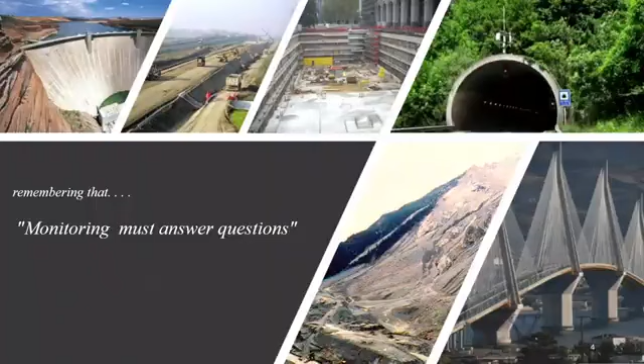This is something that I remember, and this introduced the concept that looking at details, we have to remember that monitoring must answer questions. Since we are dealing with many different types of projects or structures, each with different problems, we have to be very keen on small details which can make the real difference. Sometimes the difference between success or failure is due to some small details. So we have to always consider that details are probably the most important part of our activity. So we have to answer questions.

Why questions? Because there is something that we don't know, some unknowns. I had permission from Alan Marr, who was the first John Dunnicliff Honour Lecturer, to use this slide that he presented in London four years ago regarding the problem of the unknowns.

We have different types of unknowns, or something that we have to understand. We have what is called the known knowns - that means what we know about something. The known unknowns - what we know to be unknown, that there is something we don't know and have to understand. There are unknown unknowns - what we don't know, something that can happen, or something we are not able to understand and consider.

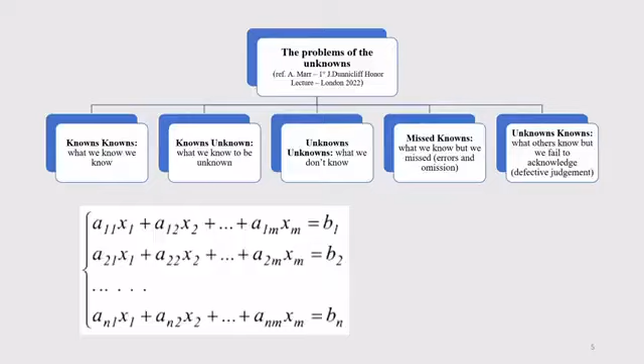Defective judgment. So we have this as reference, and if we look at this from the analytical point of view, it's like having a system of equations to solve, where sometimes the number of unknowns is greater than the number of equations that we have. That means we cannot solve it. This means our knowledge of the world we are dealing with is limited. We don't know everything about what is around us.

So we started from question to answer. We realized that our knowledge is limited, that we need understanding. But how can we solve the problem if the analytical solution is not possible? We have to change completely our approach.

We have to use two capabilities that we have: genius and ingenuity. What are they? Genius is what we can call intuition - a person's characteristics, disposition, natural inclination, or temperament, something that is inside us and enables us to understand, to know something. Ingenuity or skill is the ability to invent things or solve problems in intelligent new ways. This is probably exactly what we have to use when we approach a problem that cannot be solved analytically. So we have to use our ingenuity and, of course, our genius.

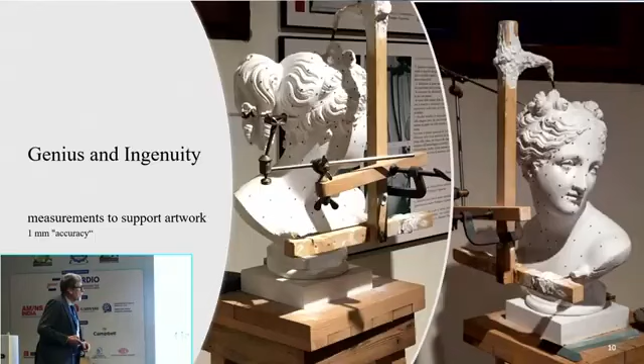The fact that I was a little scared is that probably when we think about art, we think about something like a nice statue, a nice painting, a melody, a piece of music. But as the definition of art I reported here says, it is a creative and imaginative human expression that uses skills and techniques to produce visual, auditory, or performative works. So it's not just a wonderful statue, but something more, because in order to reach that level, the author of that statue, Antonio Canova, used his skill and ability - his genius and ingenuity - to prepare it. This is the mock-up, the model he did using plaster.

By using plaster, you can modify, you can correct something. When you work on marble, you cannot change what you have done. If you make some mistake, you have to throw away everything.

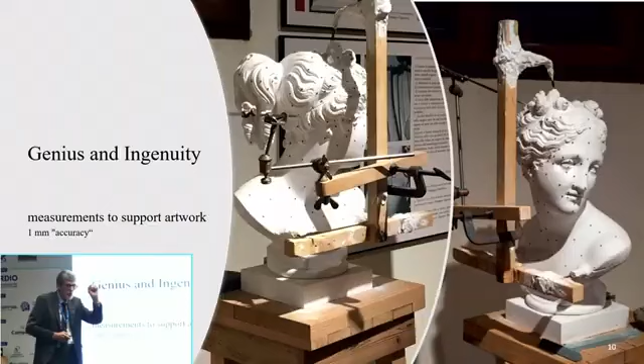So he prepared a mock-up, and you see all these black dots are reference points he used to measure. He measured the position of each point to reproduce them exactly on the marble, in order to be sure that the result was exactly as expected. This is something that, in my opinion, is genius.

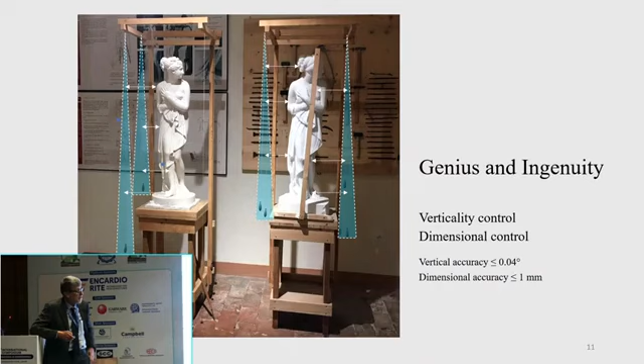Moreover, in the past, they used, when preparing a statue, to control it with these plumb lines, to control the verticality and the dimensions by measuring the distance between the plumb line and the statue. And if I put here some numbers, the level of accuracy they reached was very high. This is, again, genius and ingenuity, done hundreds of years ago without the instruments we have today.

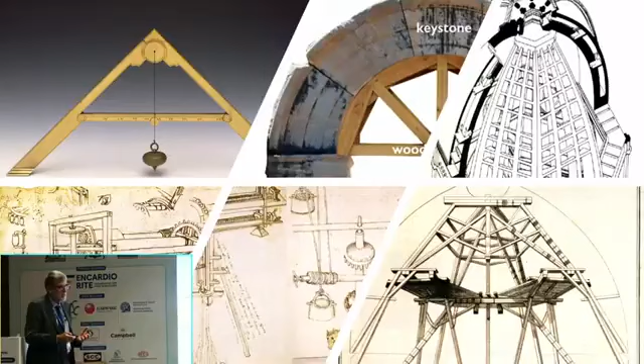So he had to invent something to avoid using scaffolding. He made his own analysis, calculation, and design, and he came up with a solution: a new technique of self-supporting dome, which avoided using internal scaffolding, only using some scaffolding to support people during the construction.

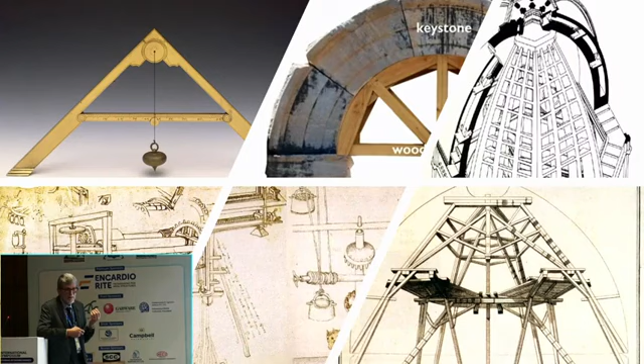Moreover, due to the dimension of the dome and the height - the top of the dome is at 115 meters - he designed and built all the equipment and machinery used to raise materials, and he designed his own instruments for controlling the construction. Is this genius, ingenuity? And the result is a piece of art.

But this was roughly in the 14th, 15th century. Even if we look back - because I'm convinced that in order to advance, we have always to look back and learn from the past - we find some very interesting examples that we have to consider.

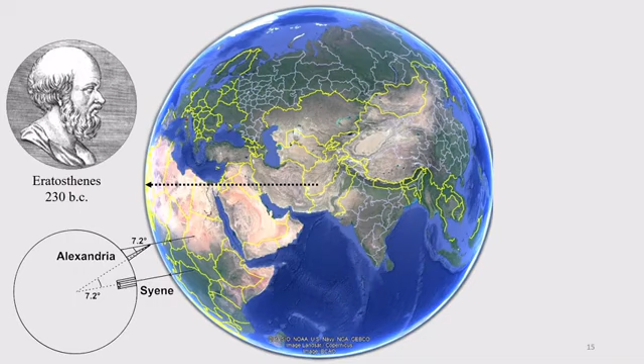For example, this is our planet, Earth. And this man, Eratosthenes, tried to define the radius of our planet. He studied a method to define it, and it was a very simple method, probably you know it well. He said: in a specific day of the year, when in a place the sunshine is exactly on the zenith, the rays are perpendicular to the Earth.

But if you move apart, the rays of the sun will be a little bit inclined. You can measure this inclination with a stick, measuring the shadow produced by the inclined ray. The inclination, the angle, is exactly the angle between the two positions. By knowing the distance between the two points, he calculated the distance, the radius of the Earth, using the measuring units of that time, and by transforming those units into meters or kilometers, he obtained this value of the radius.

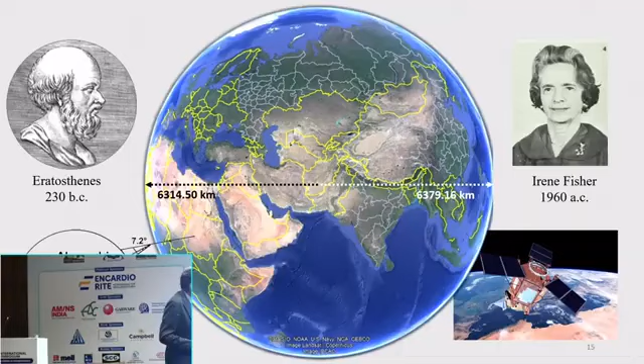More than 2,000 years later, Irene Fisher, an Austrian-American scientist, by using satellite images and measurements, defined the radius of the Earth in 1960, the value we are using nowadays. She found that the radius is 6,379.16 kilometers. The difference between the two is less than 1%. So 2,000 years ago, someone was able to measure the radius with an accuracy less than 1% off from the actual one.

Fantastic. Again, many years later, approximately in the year 995, another scientist, a Persian scientist, Al-Biruni, made another calculation.

And by using a different technique, he calculated a radius which was 0.6% less than the actual one. Fantastic accuracy, if you consider the instrument they used at that time.

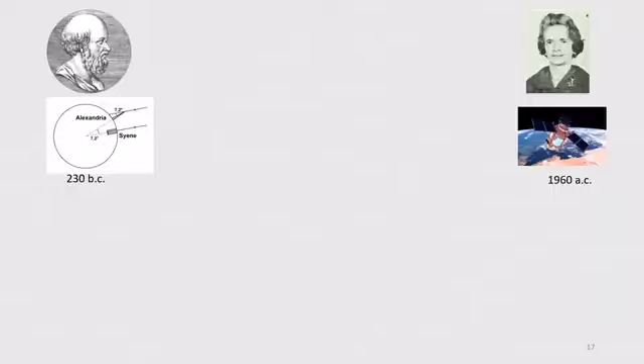I hope this triggered in our mind the idea that it is not the instrument itself which produces the right solution, but something more. Anyway, many others during the past centuries measured the radius of the Earth, obtaining different values.

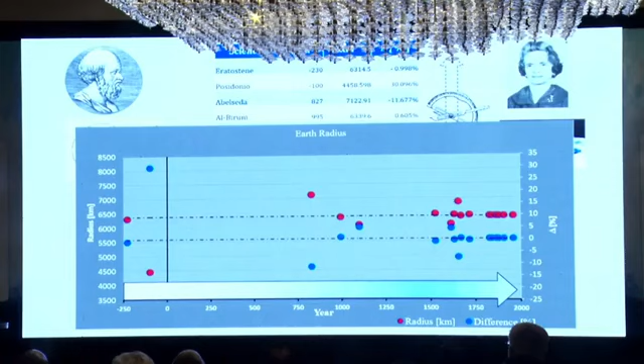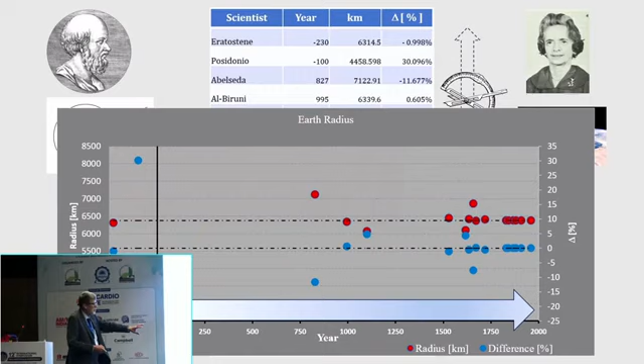If we plot these values, calculated using different instruments, starting from very simple ones like Eratosthenes and others, to some basic geodetic instruments, to satellites, we get this graph where the red dots represent the radius in kilometers, and the blue dots represent the difference in percentage referred to the actual value.

We see that Eratosthenes and Al-Biruni did something very accurate. Someone made some big mistakes, probably. But what is interesting to know, or to get out from this plot, is that...

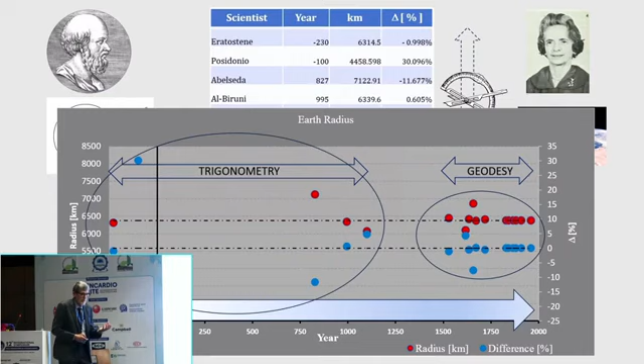We can consider the first part of the measurement was made using basically trigonometry only, and the second part geodesy. That means that here the accuracy was due mainly to the operator, let's say, to the man who measured.

Here, when the instrument becomes more and more accurate, all the results are closer to each other, because when you have a good instrument, of course, it is easier to get good results.

And this again has to trigger in our mind something: it is true that good results are related to those who take the measurement, but it is also important to have good instruments if you want to collect good results. So we always have to combine these two.

And this is why, again, I think that the two properties, genius and ingenuity, must be together in order to proceed in this activity.

Another example, this is very nice, I like this very much, is the definition of a meter. We all use meter to measure something. Probably you know the story of the meter, how it was defined. The first definition goes back to the 18th century, exactly in 1791, and it was defined as 1/10 millionth of the distance from the equator to the North Pole through Paris. Okay, this was the definition.

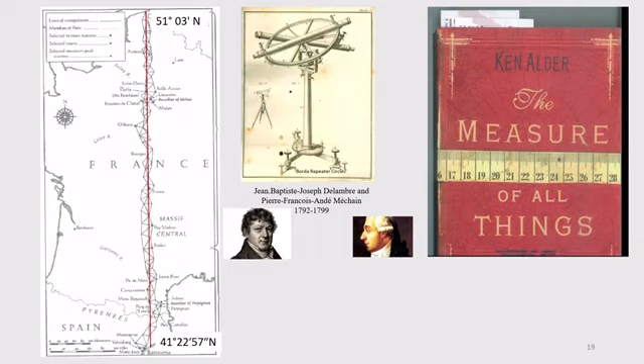So in order to measure or define the meter according to this definition, the Academy of France launched an expedition led by two scientists, Jean-Baptiste Delambre and Pierre-François Méchain, to really measure on the ground the distance between Dunkirk, north of France, and Barcelona.

And they said, we have to measure this distance, and by knowing the latitude of the two points, we can calculate. We can measure the distance, we know the angle, and by knowing the angle, we can calculate the distance between North Pole and equator.

This expedition started to measure this and took 7 years to complete. You can imagine at that time, using instruments like this, measuring more than 1,000 kilometers through mountains, forests, rivers, cities, a very difficult environment.

They took 7 years, and the result was that the meter they calculated was 0.2 millimeter shorter than the one we are using now. 7 years of measurement, very simple instruments, needing maintenance and calibration during those 7 years.

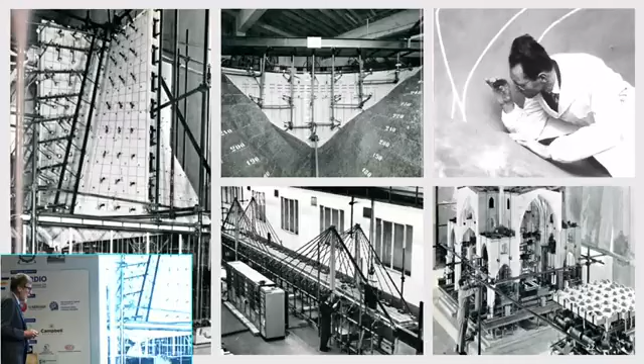As I said in my presentation, I have been working at an institute in Italy called ISMES, Istituto Sperimentale Modelli e Strutture, Models and Structures. This is the way things were done back in the 60s or 70s, I was not there at that time. But when computers and finite element methods were not available, they used to build physical models to try to understand the behavior of a structure.

Again here, 500 years later, we built models to understand the behavior. By instrumenting the models and applying loads, they were able to understand the behavior and realize where the critical points were and what was the maximum applicable load, for example. These are examples of dams, bridges, buildings, and so on.

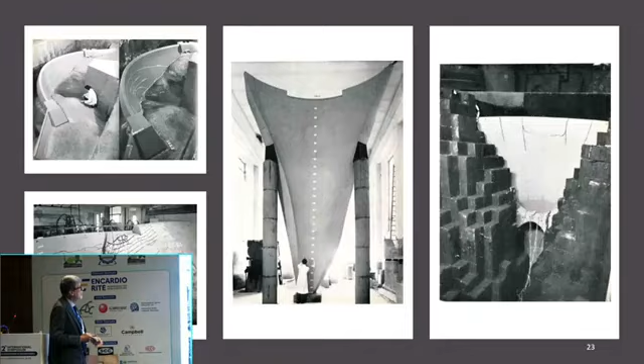Sometimes these are quite big models. This is the model of the Vajont Dam in Italy, and the model itself is about 7.5 meters in height. Models were tested not only as a structure, but together with the surrounding soil or rocks, the abutment where the dam is founded, in order to analyze and understand the behavior.

Here there is a short movie, unfortunately very old, from the 60s, where you see the construction of the model, the measurements taken by mechanical devices, and the first electronic recording systems used to understand the behavior of the dam, to measure the level of strain, for example.

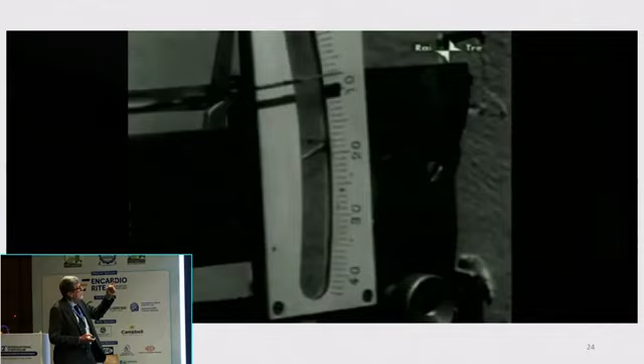These are mechanical strain gauges used at that time, and you see the strain gauges move an indicator. The guy here is painting the cracks that open until failure. So by comparing the applied load to the measurement of stress, the behavior of the dam was understood.

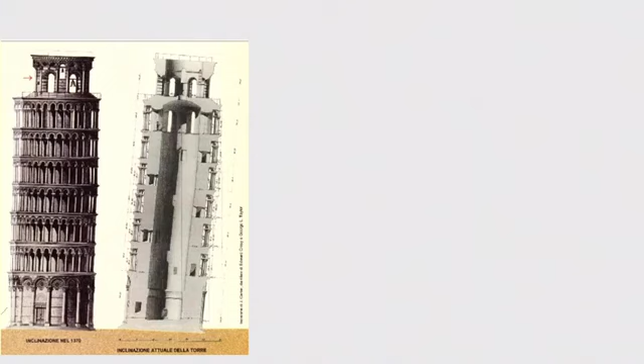Another example: this is the Leaning Tower of Pisa, mentioned by Andrew. Everyone probably knows it, and you know that it is leaning. Unfortunately it was continuously leaning.

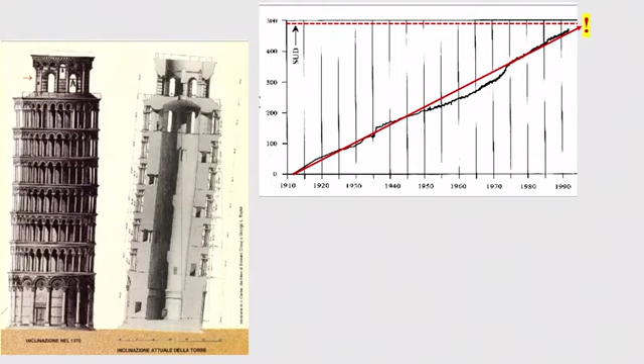More than 20 years ago, a scientific committee was established to analyze the situation of the tower, and they found out that it was very close to a possible point of failure. So it was necessary to intervene and avoid the failure of the tower.

A lot of studies have been developed on the Pisa Tower, probably someone here in this room has worked on it. It was a very complex problem, not mainly because of the structure itself, but from the point of view of the soil behavior.

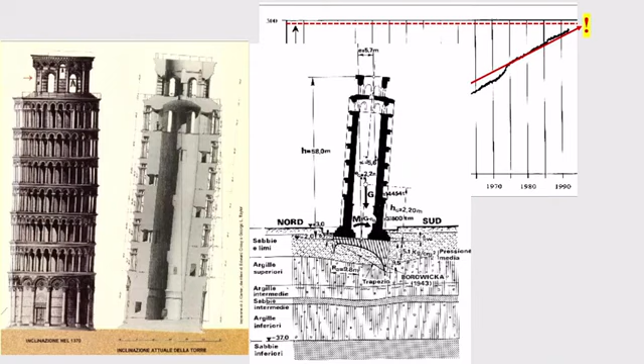After studying the problem, it was decided how to intervene in order to stabilize, or better, to reduce a little bit the tilt of the tower, giving it a longer lifetime. The intervention was mainly based on a temporary application of counterweight on one side in order to avoid or limit the tilt.

The final solution was to take out material from beneath the tower, beneath the foundation, to induce a counter settlement which stabilized the tower a little bit. It was calculated that a settlement of approximately 170 millimeters was necessary to reduce the tilt by 0.5 degrees, which, due to the height of the tower, means approximately half a meter at the top. This was the idea, but of course it had to be controlled or measured some way.

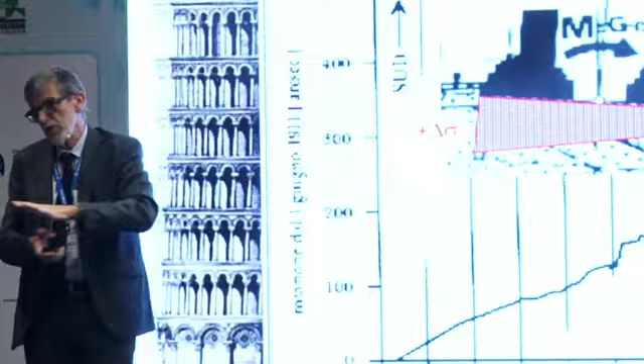So this half degree, or half a meter, meant that the total stresses, the contact stress between the foundation and the soil, had changed, increasing on one side and decreasing on the other. This was one of the most critical points to consider, because measuring the tilt is quite easy. You can use an inclinometer, a pendulum, geodetic measurement. It's quite easy. But how can you measure the level of the contact stress

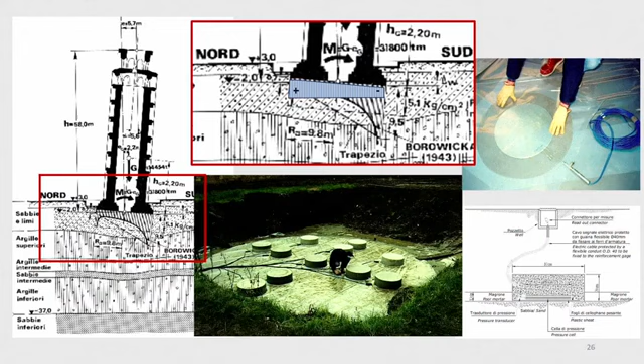beneath the foundation? It is not possible. So again, as you have seen for the dam, it was decided to build a model of the foundation. This is the model foundation, approximately 6 meters in diameter, to install some total pressure cells, build the slab and load it, and then excavate in order to induce the settlement.

The problem was how reliable the measurement of the contact pressure could be. We all know that contact pressure is one of the most critical parameters to measure in geotechnical monitoring. So that was a challenge.

The solution came from a long discussion with the technical committee, mainly with Professor John Burland from Imperial College, who suggested a special technique presented here in this picture: using larger diameter cells and protecting them with a thin layer of plastic, to reduce or avoid the problem of a possible gap between the cells and the concrete due to the change in volume of the cells during concrete curing and the subsequent reduction when the temperature went down.

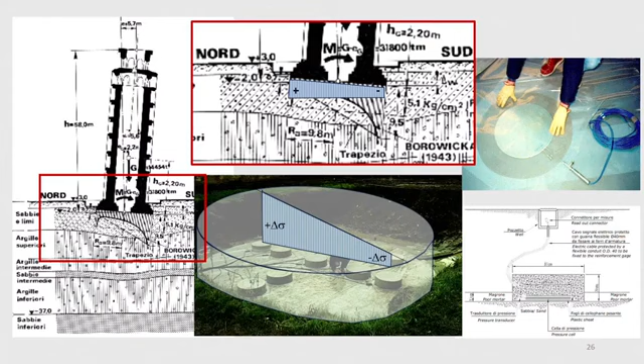So it was done. The model was built and tested, and the results were used to control the deformation, the back-calculation of the tower's movement. This is the result of discussion, of the intuition of Professor John Burland, and of the skill of those who worked there.

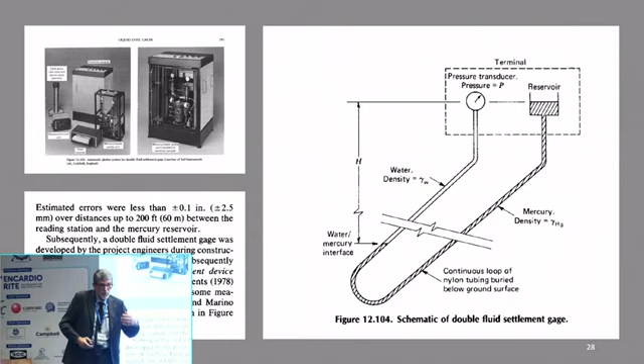So someone invented a system described in the Red Book. This picture is taken from the Red Book - it was called the double fluid settlement gauge, which used a hose running along the crest into which mercury was injected. The pressure exerted by the column of mercury was proportional to the settlement. We started from zero when it was perfectly horizontal; when settlement occurred, the column of mercury applied a certain pressure. That was another interesting solution developed specifically for this purpose.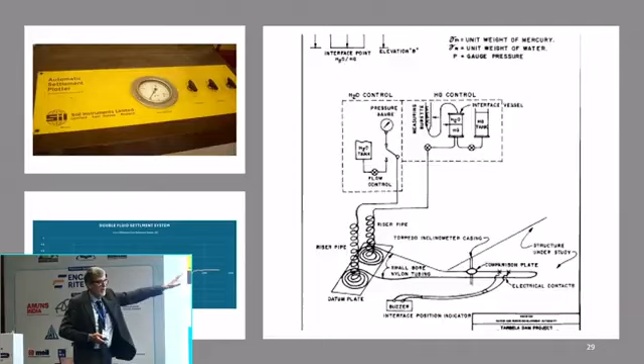Again, genius and ingenuity. This is the actual equipment, and this is the original scheme produced at that time, with some measurements.

Moreover, something very simple was needed to measure horizontal deformation in a dam. When you have a dam more than one kilometer wide at the base, how can you measure the movement inside the core or inside the body? How do you measure horizontal deformation? The solution developed at that time was to install reference plates with steel cables inside a hose, inside a conduit that went to the end of the dam, to its face, and up inside a box.

Inside the box were counterweights. So if one point moved downstream, the specific counterweight moved down because the distance was decreasing. By measuring the position of the counterweight, it was possible to understand the magnitude of the deformation. A very simple solution - sometimes simple solutions are the best. And here we don't need to measure to within one millimeter of deformation, so another point is that we have to know what level of accuracy we actually need.

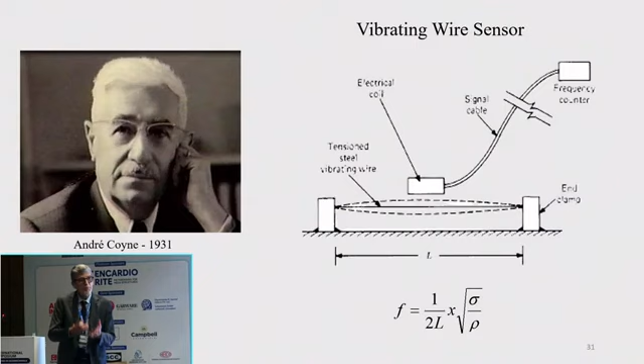But there is another man we have to thank. This is André Coyne. He is the one that developed and patented the vibrating wire sensor, which is the sensor we normally use and consider to be the most reliable in the world. He was a dam designer, and he wanted to understand, to measure the behavior of his designs. And he developed and patented this vibrating wire sensor, which we now use in many different types of instruments, used nowadays as normal instruments. So, another man who used genius and ingenuity to solve a problem, because he had the need to understand the behavior of his design.

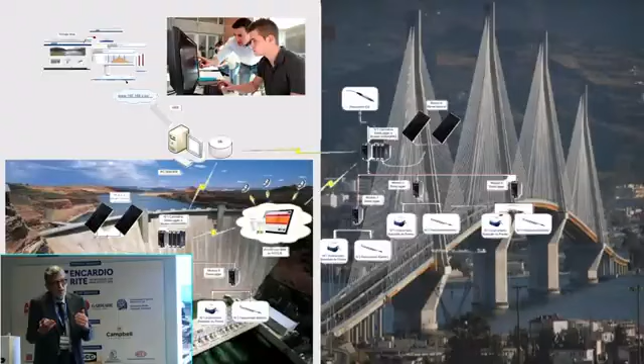But the title of the presentation is the art. Why art again? I repeat the definition, because nowadays the art of understanding, or the art of setting up a system which enables us to understand something, is the capability of putting together such a large number of information coming from different types of instruments, which, if not correctly organized and understood, create more problems than the ones they solve. So the art is to be able to understand the scope, how many instruments we have, which type, how to collect data, how to put data together, and how to present the data. When we do that in the best possible way, we are doing something which can be called the art of monitoring.

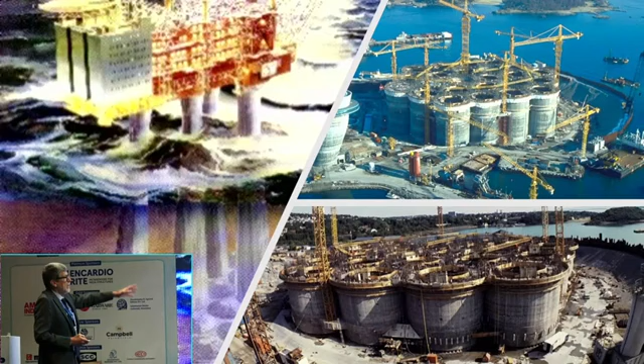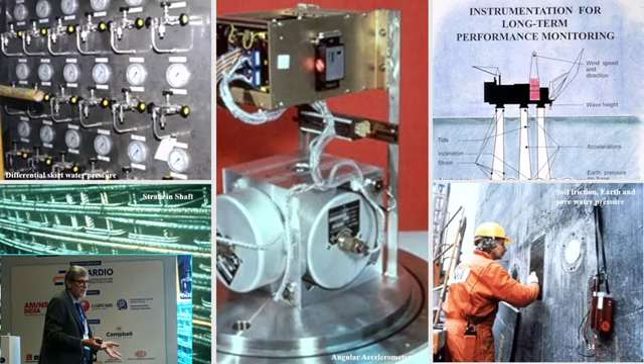An example, courtesy of NGI, our friends here. Imagine a structure like this: an offshore platform based on a foundation made by a number of caissons which penetrate into the seabed to stabilize and create the foundation of the structure. These caissons, or skirt piles as they are called, have been heavily instrumented, as was all the structure itself. Here the art was to put together all these different types of instruments, to collect all the information, and to provide the owner of the structure with all the information to assess the safety and stability of the platform.

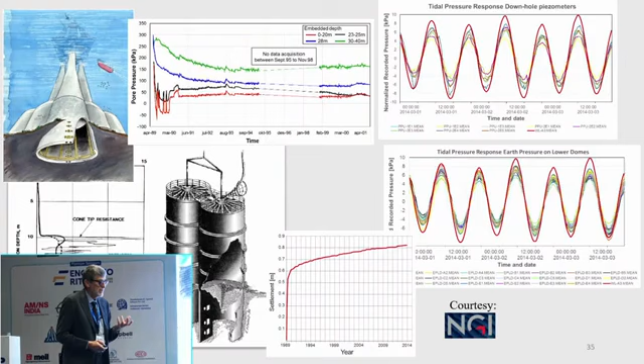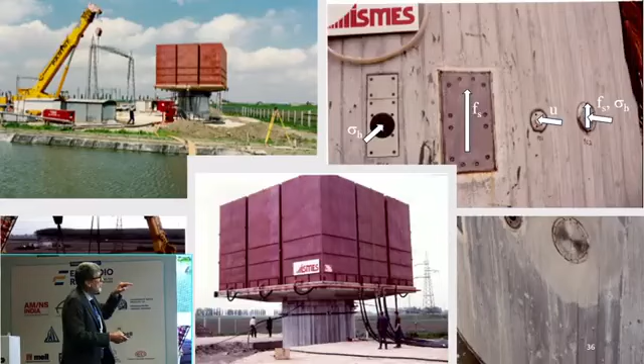And these are the results I've been able to collect from the measurements, and again from models tested before construction, in order to get the feeling and understand how this skirt pile behaves. Something similar has been done onshore by building a concrete skirt pile, 10 meters high, 5 meters in diameter, which was penetrated into the soil using a water ballast on top, measuring skin friction, horizontal pressure, pore pressure, and so on, to understand the behavior of such a structure during installation.

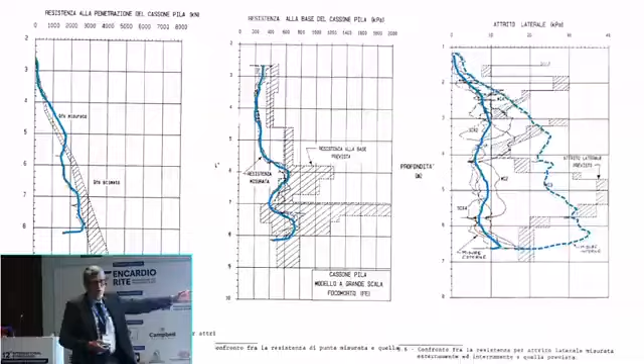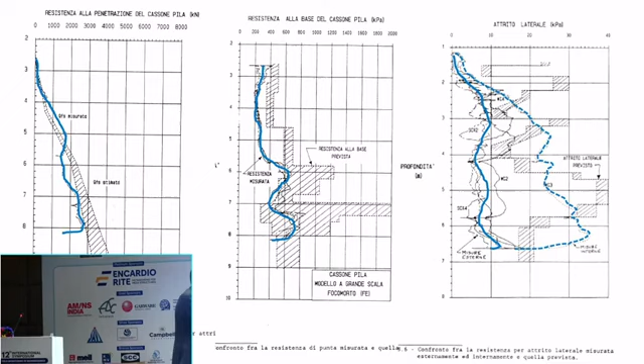You see here the reference instrument, just to measure the penetration of the skirt. Anyway, these were the design calculations, and these are the results from the measurement. This is the resistance to penetration, this is the base resistance, and this is the skin friction, outside and inside. By comparing the results obtained by instruments to the design hypothesis, it was possible to understand the behavior of the caisson. That's another interesting case.

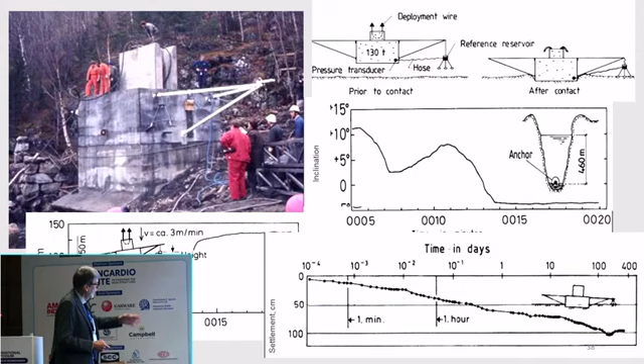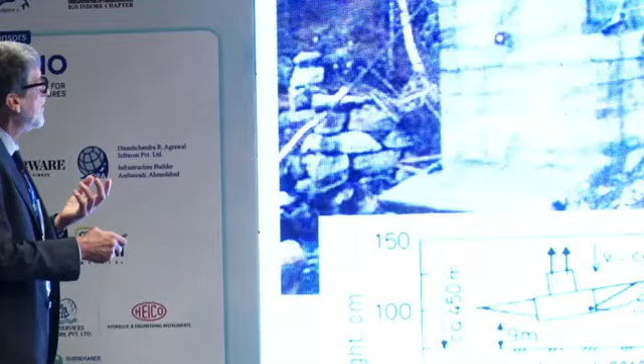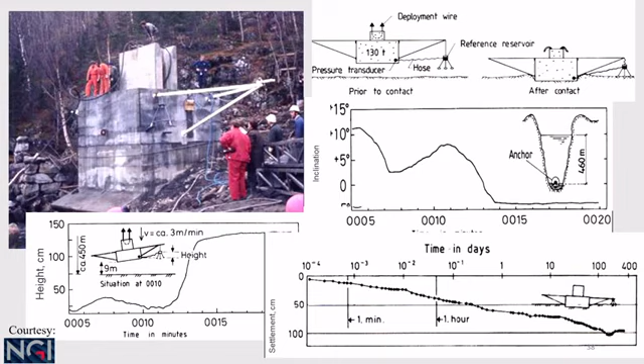The last case that led me to the next step is this test, again from NGI: a test on an anchoring block weighing 130 tons, which had to be installed at the bottom of a fjord. The purpose was to measure the settlement of this anchoring block into the bottom of the fjord. The intuition on how to solve the problem was very simple. You see here, they attached some arms to the block, and to the arms is mounted a sort of reservoir with a hose and a pressure transducer here. When the block touches the bottom, we have a sort of head of water, or hydraulic head, from the reservoir to the transducer, and that was the zero reference point. During the settlement of this block, this hydraulic head changed, increased, and it was possible to monitor this over time. Very simple, but very useful.

That means to be able to do all these things, but mainly to know what is worth, be able to explain why and how, why and how to do, and take responsibility. Back again to the problem of responsibility. If we are able to do that, we can take responsibility.

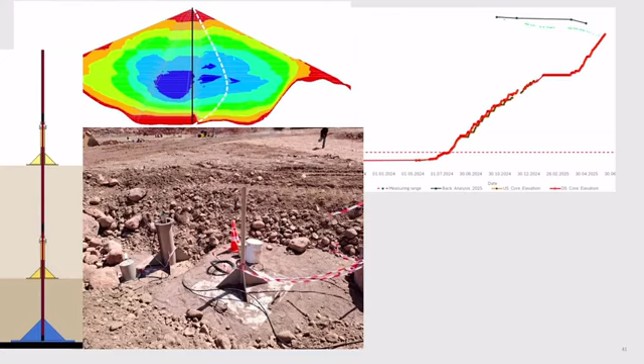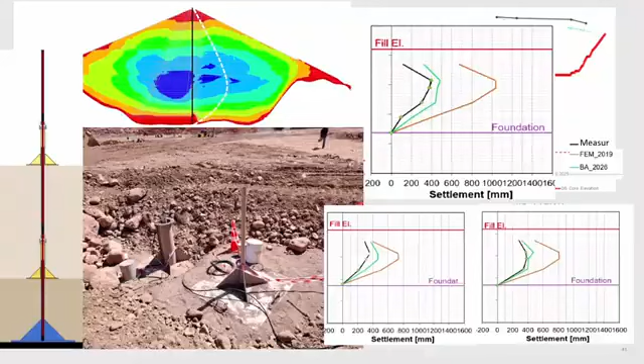For example, we can present data in this way. This is the expected, or design, settlement. The green is the back analysis, and black is, in this case, different - here black are the measurements. And this tells us something more. Better, immediately we can realize that we are, let's say, far away from the limit.

So we immediately understand the behavior of that embankment. Well, but we can do more than that. If we plot the results in this way, we have the settlement for embankment I. This is the expected or design settlement, and these are the measurements for the same position at different times. Each line is a different time, and at a different height. So we immediately see how they tend to go toward the expected behavior.

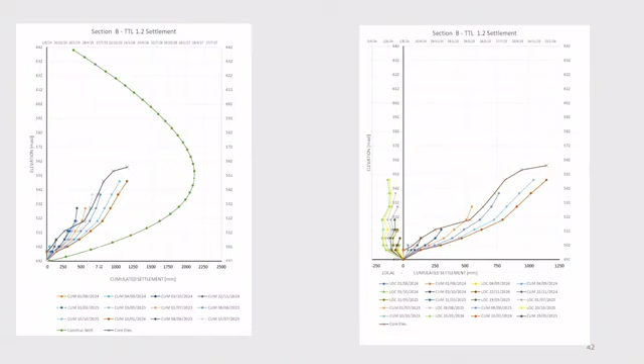But we can do something more. We can add to this - this is a sort of cumulative settlement, but we can also have something similar to what we do with an inclinometer: the local contribution to the total settlement. Here, if this line were vertical, it means that the contribution of each step is constant. If it is changing, it means the material is stronger or weaker. So immediately we understand what is happening.

But we can do something more. If we analyze a specific height, we can compare the stresses to the deformation, to the embankment height, and in some way calculate the modulus of the material during construction. And this helps in analyzing the result.

Something more again, but using the same data. By analyzing a single point, if in this case we had the possibility of observing a period of no construction or no increase in embankment height, we could measure and monitor what happened during that period. Because that was a winter break in construction, it was possible to measure, to monitor what happened during that period. This is a sort of, forgive me, consolidation, which provides us other information about the behavior of the dam. Of course here we can also measure or monitor the pore pressure to be compared with the settlement. So this is something more.

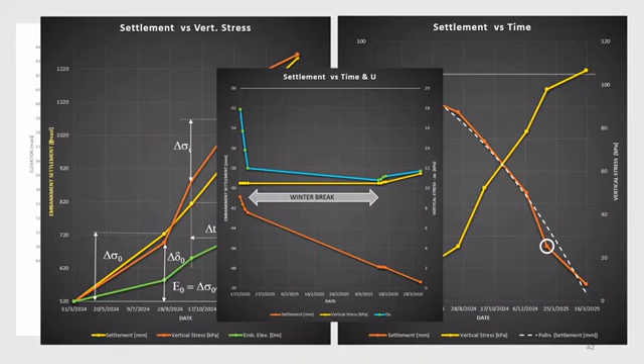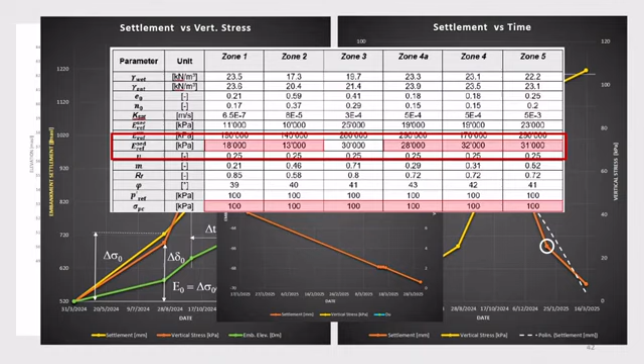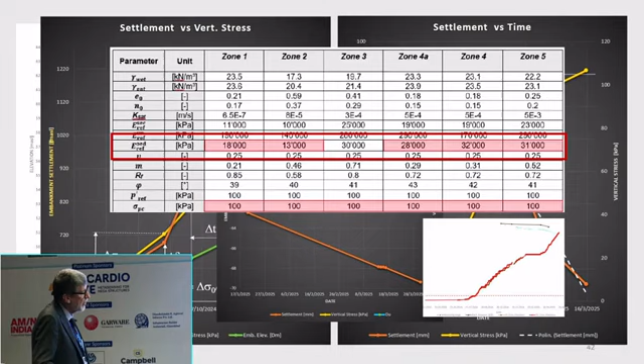We started from a very simple way of presenting data, and we came out with this. And this enabled the designer to optimize the parameters to be used in the back analysis, and even for future activity. What we have seen is something probably much more than just presenting data in this way. So presenting data is really a sort of art.

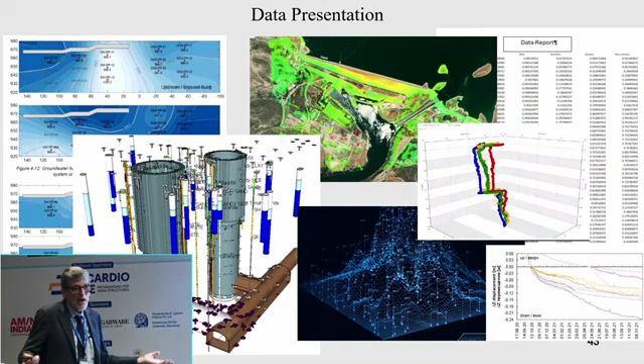Nowadays we have a lot of tools that we can use for presenting data. This is something that at the beginning of my career was not possible. At the beginning, we just had tables and some plots. Nowadays you can use many different ways, and you can select the most appropriate. But...

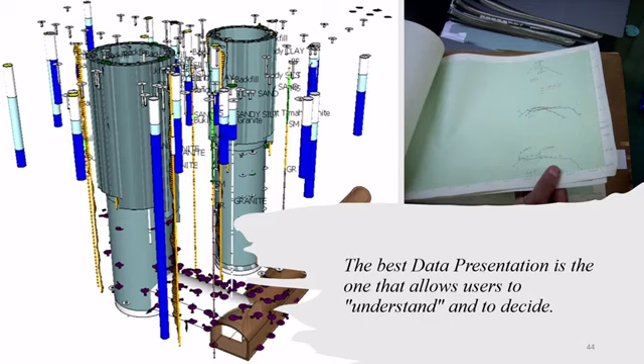Remember this: when you are able to use one page, you know everything. And moreover, the best data presentation is the one that allows users to understand and to decide. It doesn't matter if it is a manual plot or something like this - you have to know exactly what is needed, not just produce something because you have the software for it. Sometimes this is too complicated to understand, but sometimes it's useful.

So we had a path through time. We started from some very simple instruments for measuring the radius of the Earth, something for measuring the meter. We had the models, we had the instruments, the electronic instruments, we have satellites. Nowadays we are using computers and software.

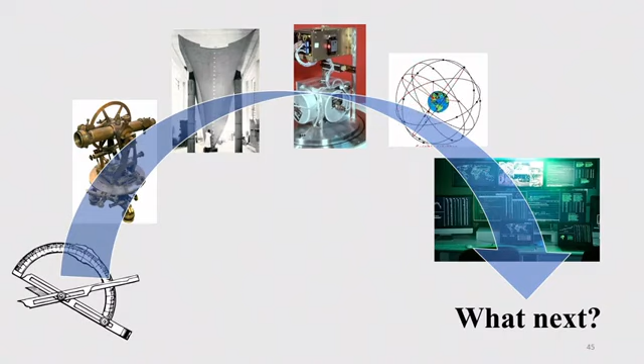So what will be the future? I don't have the sphere to say what will be in the future, but I can guess. I can guess that the future will be something like this. It has already been presented before, probably by Anil.

It means that in the future, fortunately, we will have the possibility to have instruments embedded into the structure already. And the matter will be how to collect and how to use all this data. But that's probably what the future will be, and something is happening even nowadays.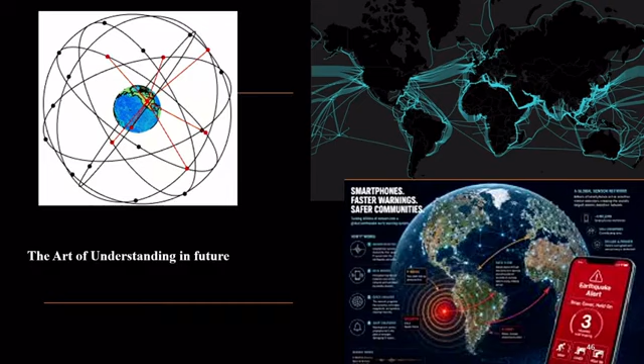And so the art of understanding - if we have a satellite, if we have something like the fiber optic network or the cellular phone network - I think that one of the main activities in the future for us as monitoring people will be how to use all these instruments which are already available, because fiber optics are available everywhere, already installed for different purposes, but we can use them for our purpose. Cell phones, the same. Two examples.

This is an example, a project followed by the Instituto Geográfico Nacional de España, probably Giorgio knows him, where the fiber optic which connects Spain to the Isles is used to measure the seismic activity of the area and to detect possible earthquakes.

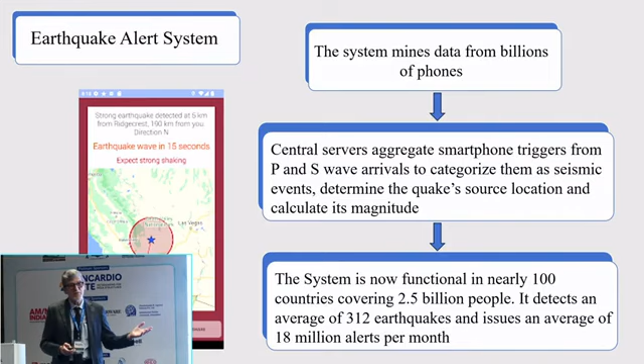But the cell phones that we have in our pocket are a very powerful instrument for detecting earthquakes. Probably you know this already exists and it's working. Someone has developed a software which collects data from billions of cellular phones, which have an accelerometer inside, analyzes all this data, and is able to detect earthquakes by measuring P and S waves reaching the cell phones.

It is something which has been used, for example, in Venezuela when the earthquake happened recently, and it worked. Unfortunately, nowadays, the difference in time between the moment the earthquake's seismic waves reach the instrument and the problems to the structure is limited to a few seconds. But who knows, maybe in the future we will be able to develop something which will improve our capability to predict what is happening. So this probably will be the future.

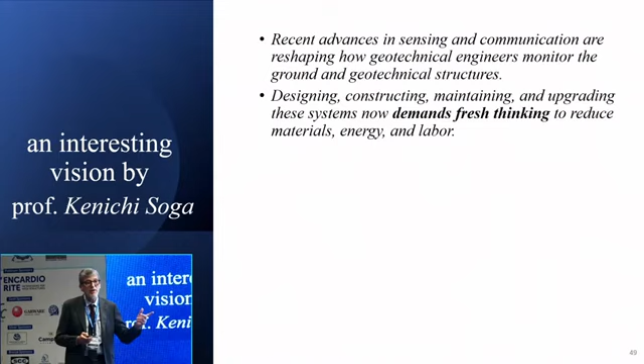Designing, constructing, maintaining, and upgrading these systems now demands fresh thinking to reduce material, energy, and labor. All these new technologies must be used to reduce the impact on the environment, the energy consumption, and the labor. This is another interesting scope of future instrumentation.

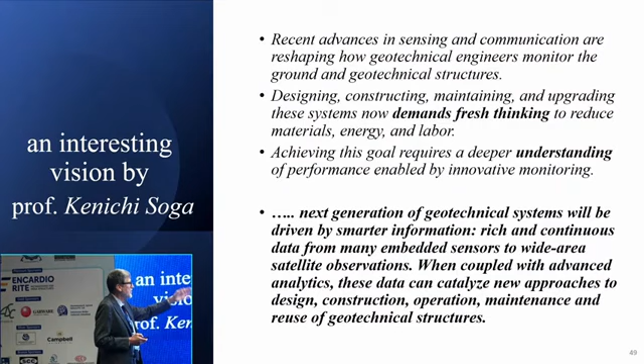Achieving this goal requires a deeper understanding of performance enabled by innovative monitoring. Again, understanding. And the next generation of geotechnical systems will be driven by smarter information - what we have seen, rich and continuous data from many embedded sensors to wide-area satellite observations.

So we will have satellite observation, fiber optic spread all over the world, but we also have contact instruments. We have piezometers, extensometers, inclinometers. We have to be able to put together all this information in order to go forward. When coupled with advanced analytics, this data can catalyze new approaches to design, construction, operation, maintenance, and reuse of geotechnical structures. I think that this vision from Professor Soga is quite interesting, and I think we can agree with him on this for the future.

So if we want to summarize a little bit the difference between today and tomorrow: today, when we have to set up a monitoring system, we have to think about selecting instruments, installing, defining installation procedures, how to communicate from the instrument to a point where data are collected. We have to think about precision, accuracy, and so on, how to work on data, how to maintain the system, and how to update or replace the system.

In the future, if we use systems like satellites and so on, instruments will be already available. The reliability and quality is something that we have to accept. Data will be available to anyone.

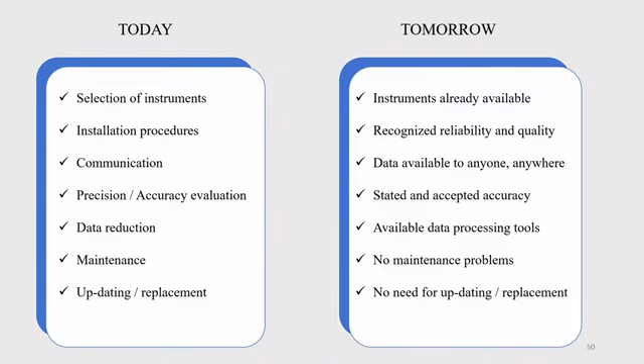Data processing tools are already available. We have no maintenance problems and no need for updating or replacement, because someone else is thinking about that. When a satellite is old, it will be replaced by another one. We don't have to take care of it. We just receive information. It's like having a piezometer which is continuously changed when it goes out of order. We don't have to care about that. Someone else is.

So if this will be the situation, you can say, okay, the famous chain inside the Red Book, the systematic planning, will not be useful anymore. Not at all. Because out of all the points, all the rings of the chain, what I have just presented is covering only a few of them. But what is really important, let me say by generalizing, is the design of the system and the capabilities of using data.

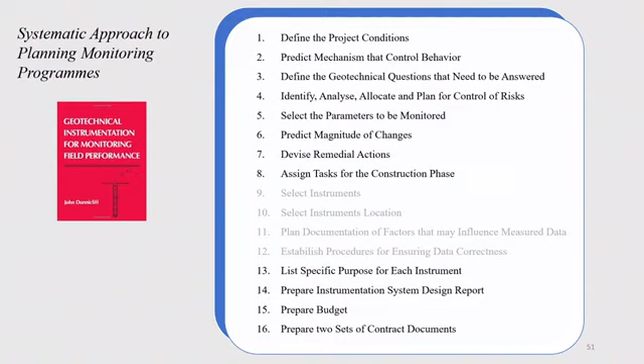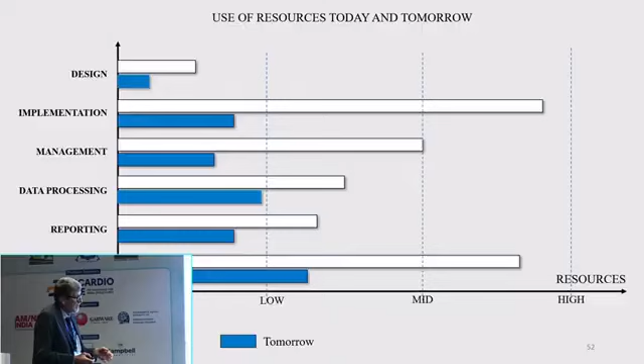Implementation, this will be a big difference. Nowadays we spend a lot of resources to implement, that means to install the instrument, to collect data. In the future we will receive data and we don't have to care about the instrument. The same for management, we don't have to manage a satellite. Data processing, something similar. Reporting, if we know how to prepare a report, will be something similar. Maintenance, something that nowadays requires a lot of resources, in the future probably not.

So if we save resources, where or how do we use these resources? Almost finished. How to use it?

First, the design. Again, this is from Kenichi Soga. I always stress this point. We need to design monitoring systems. We are engineers, we are used to designing something. I don't understand why, when we deal with monitoring systems, no one is considering the design. And design is not paid for. In the bill of quantities, in the contract, design is neglected.

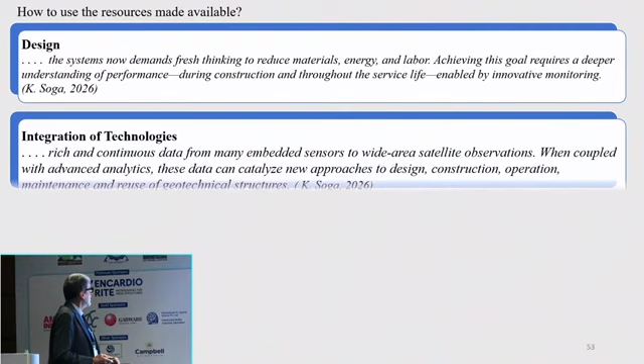So we have to use the resources that we will have available in the future to design systems, to integrate technologies, because we have very nice technology like satellites and so on, but before they will substitute an instrument like a piezometer or extensometer, it will take a lot of time. We have to use our resources for back analysis, because this is a very important point, because monitoring data which are not used to back analyze the behavior of something are useless.

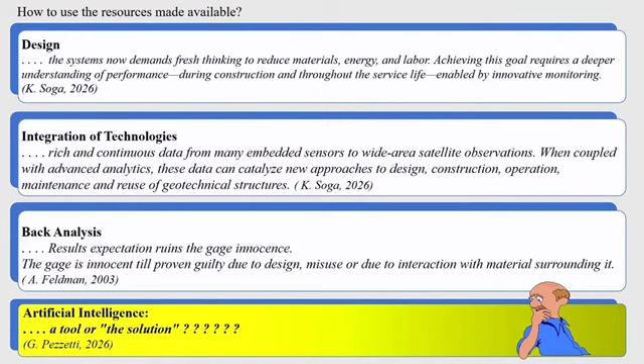And in the future, we will have to deal with artificial intelligence. I'm quite old, so I am a little bit skeptical about artificial intelligence. My idea is that, unfortunately, the fact that it has been called artificial intelligence is biasing our idea. Because nowadays, I think it is more a tool than a solution to something.

Why this? An example. A few weeks ago, I was working on landslide data. I had a lot of data to analyze, and, unfortunately, the quality of the figures was not so good. I started analyzing data, starting from a lot of Excel sheets, blah, blah, blah, and I started working on them, collecting them, and comparing with some satellite data. Well, a younger colleague told me, why don't we try to use artificial intelligence? I said, if you are able, why not?

He prepared a data set, sent this data set to I don't know where and who, and the result, in a few minutes or hours, was something unbelievable for me. He produced these 3D maps comparing the digital terrain model to the measurements, to the satellite images, and everything. So in, let's say, seconds, he solved the problem that would have required hours or days from a single person.

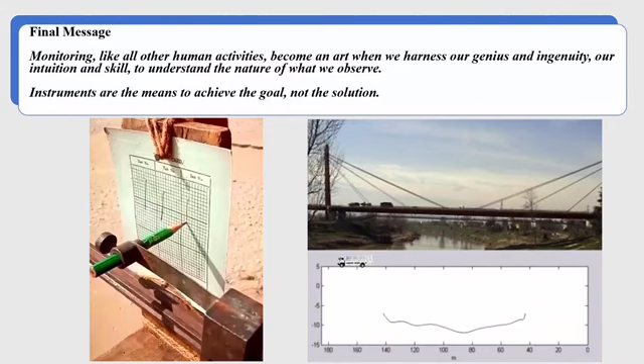And let me finish with this example. If we have to monitor the deflection of a bridge, we can use a very sophisticated radar or something like this. Which one is the best? Which one is the best?

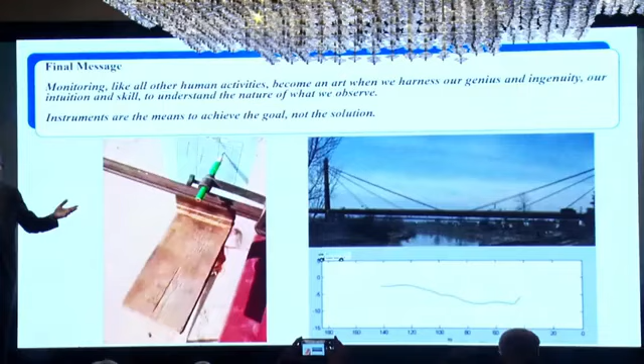For sure, radar can provide us a lot of information about what is happening to that bridge. We can take out even some dynamic information about frequency of vibration, modal deformation, and so on. This other method is very simple and just provides us the value of the deflection - maybe not as accurate as that one, but it could be enough. So again, the real problem is not which instrument we have to use, but what we have in mind as a scope and what we have in mind in terms of the problem to solve. And mainly we have to understand exactly what we want to have.